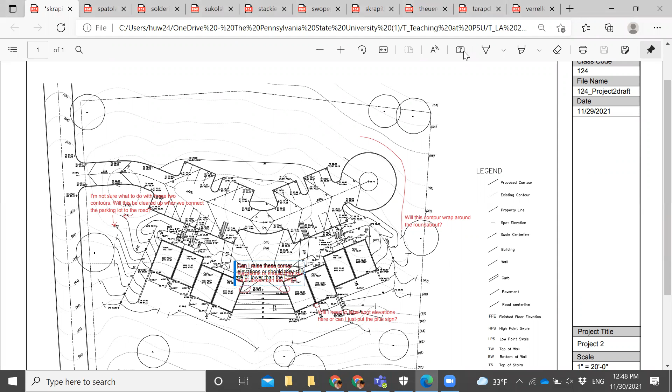I'm not sure what to do with these two contours. So I think the bigger issue is actually the contours before your buildings. Once we fix those, the contours on your parking lot will be a lot easier to do. Okay, so that's that, we'll come back to that.

Will this contour wrap around the roundabout? Yes, you have many contours on the north side of the parking lot that haven't been connected yet, so yes, they will be going around the roundabout. And the way to do it is to try to figure out the curb elevations here, which I will show you. Both questions are very good.

Do I need to label spot elevations here, or can I just put the plus signs? Oh, you will have to label them. And the way that you labeled them are correct.

And these two, can I raise these corner elevations, or should they still be 6 inches lower? Once you get to this point, these spots don't really have a direct relationship with your FFE. It's actually determined by the contours on the landscape. Okay.

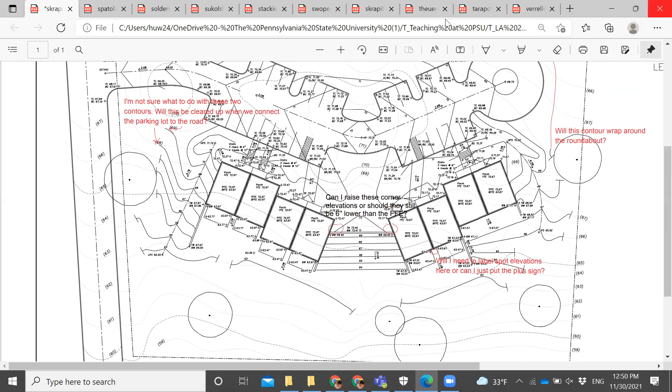Now I think it makes the most sense to look at your contours in front of the houses. Okay, I will turn up my speakerphone so that all of you can hear. Okay, better. No.

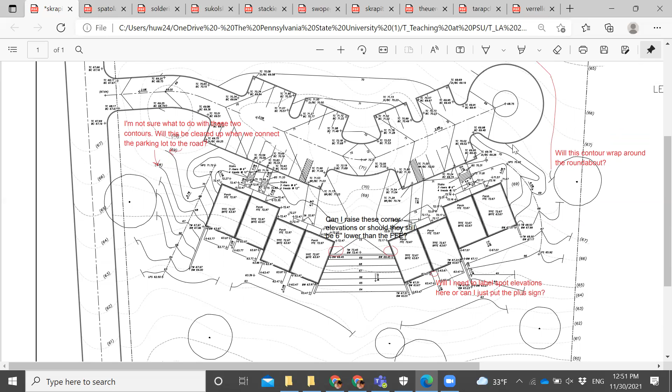So if I do this, I actually don't need to eyeball it exactly, I can move this over here. So I know you have a contour that needs to be connected somewhere over here, like that. And I can extend it, and that one I can extend.

So let's avoid this situation because we're going down, right? If we don't want to do that, given that your contour line slope is 9, it's relatively steep, so let's not do that.

Instead, let's use this line as a dividing middle line and split this. I know this doesn't really help, so just draw it in. These will be your 69 again, so that will be your 69.

So that's the parking lot contour part, we still have to fill that in. Now,

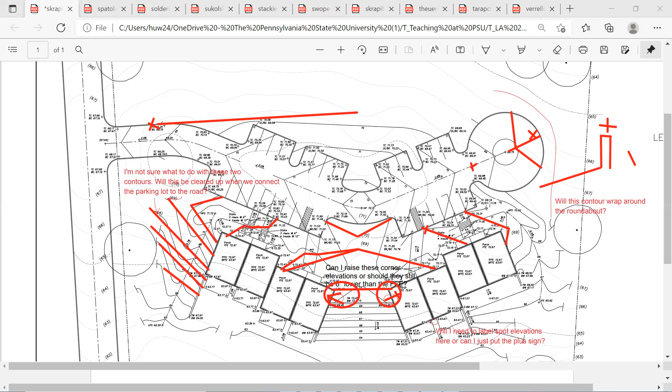Okay. The major question for you is actually these two contours over here. And then adding ramps, you have already got the stairs. Let me just pick one set of your walls and see if the walls are designed correctly.

I want to try to. Okay, so let's suppose we use your solution here of BW equals to 64. That's because you have 64 attached to this wall, but actually it can't be, because you have 63.97 down here, so your 63 needs to be along this line. So this contour, okay, if you want that 64 to hit the wall, for instance, you have to hit the wall.

For the end of the wall, there's only one spot elevation, because around that end of the wall it's the same elevation. It cannot have differences between the two sides of that wall. Okay, so if you want 64 to hit that wall, you have to connect up.

So then this BW does not conflict with the 63.77 here and the 63 over there. So the BW here, if it's the end of the wall, you would interpolate between the 63 and the 63.77. That is your BW. So that is how you design that wall. Okay, but of course you don't need that swale, as we explained before.

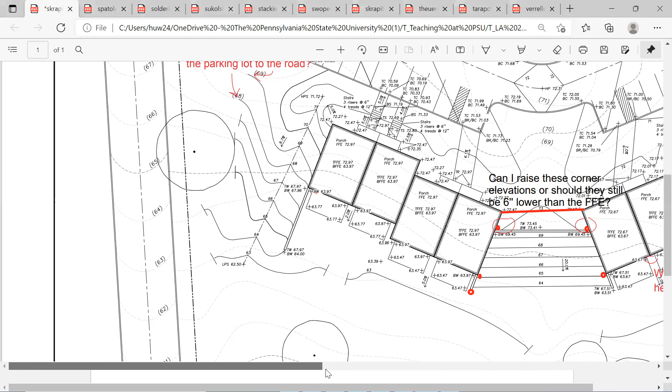Okay, I just want to check one side of the wall so that another major area that needs your attention would be clarified. Okay.

Well, why don't we try to go through all the submissions, and if any of you have more questions than what you have annotated on your file, we can come back to those, okay?

Let's take a look, the second submission. Clear, so I'll make sure if this is Joe. If Joe is here.

Does anybody know if Joe is here? Okay, okay, cool.

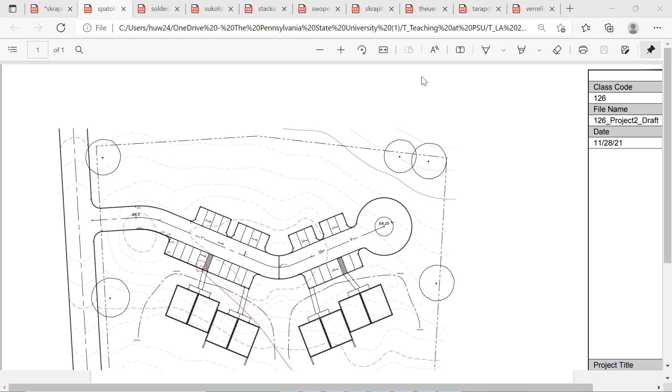So we have the center line now, we have the HP. We're trying to design the swale like that.

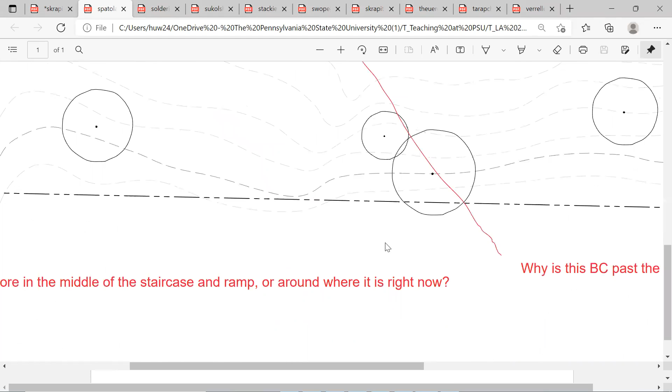The question is, why is this BC past the existing contour? Well, the existing contours don't actually matter that much anymore. By grading the center line, you already modified the original topography substantially, so you shouldn't be concerned about how your designed elevation for the parking lot doesn't agree with the original contour. You're actually redesigning the entire area, so that doesn't matter that much anymore.

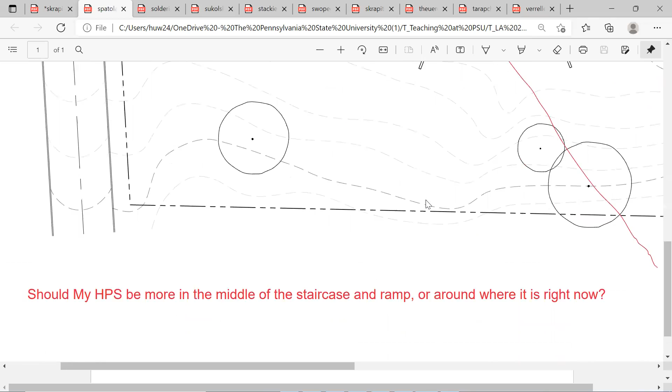Shall be trimming the curbs at the bottom of the stairs and ramps. You will be trimming the curbs right here. Yes, if your ADA ramp is right there, then you would be trimming that one. This depends on whether or not you use option 1 or 2 that we just showed you in class for your curb ramp.

If you did not intend to design a connected sidewalk like this to all the units, you can have one ramp over here that's the curb ramp, meaning you break exactly this portion of the curb. But you'd still need a sidewalk for the other areas. Designing just that one curb ramp for that unit is probably not a very cost-effective use of resources, because you want others to be able to share that.

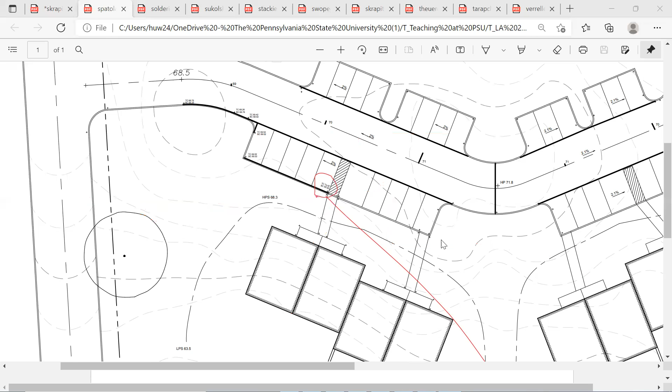I do recommend that you go watch the video recording from the week before Thanksgiving. I believe, at least in my group, we went through multiple examples of checking whether we killed a tree, or how we keep a record of whether we have 2 ADA accessible units and 2 units that are not. Definitely try to go back to those videos as soon as you can. So that covers all the questions on this section.

Okay. Again, let's go through these submissions, we definitely have more time. We'll have another chance to talk throughout it.

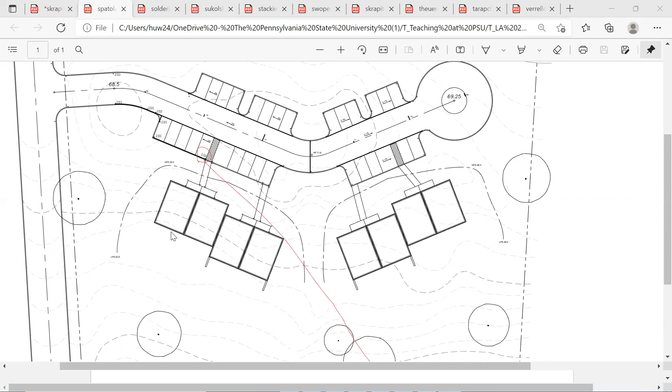Next one, let's see, I can't see the name. This is Aaron's. Aaron here? Okay, cool. All right, zoom in.

I can see in terms of elevations we're showing the progress, the key elevations, and we have elevations on the tangents that meet the road. So what we need would be that one. You can actually just start with that one, but you don't yet need that one to calculate these. So if you did not have elevation along this curve, that's totally fine. Starting with these two, we'll need you to have every spot elevation at every tangent.

Any form of swale, no, you don't need swales on that side because we're going down, consistently going down in this direction. We're consistently going down in this direction, so for that one, on the north side, you do not need a swale.

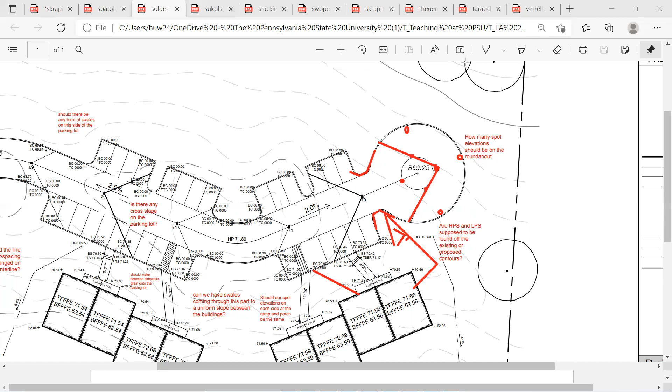Should the elevations on each side of the ramp or porch be the same? For the ramp, not really — it really depends. For the porch, yes; for the ramp, no. So for your 72 that's likely coming down up here, well the 72 might also do the kind of connecting to itself thing. And you have a 71 over here, another 72 likely coming up. So that's that, the same thing, like this.

So your ramp or walkway elevation will be dependent on the slope that you design for your walkway and the spot elevation you set. Generally you can see there is a slope in that direction. Okay, so if you mean whether or not this one and that one have the same elevation, likely not, because the contours are not parallel to the side of the building. So if that's what you meant, then those two elevations will very likely be different.

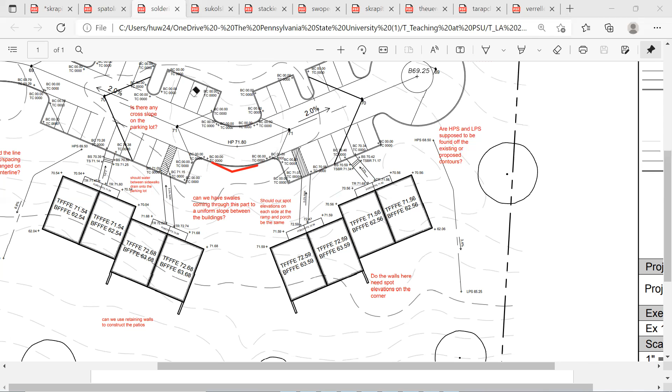Any, should the line weight spacing be changed on the center line? So right now, the center line you have here does not reflect the short dashed line yet. I would follow whatever drawing design standards we gave you for exercise 2 when we traced that construction drawing.

But again, we would need to work on the contours in front of the building before we come to the design of the square. And likely, I don't know exactly yet, you likely wouldn't need a swale on this side either, but you could definitely still spot it. That's weird. I don't have any other speakers, so well, I'll try not to turn away from my computer.

Water between sidewalks going onto the parking lot. Yes, please. And I still would recommend that you have a sidewalk connected across the entire townhouse; having one sidewalk is a much better design. And also stairs in case someone wanted to go this way, go that way, and then go that way. That area seems a little small to me, especially this one. It limits the option for people that want to go from the sloped lawn area to your sidewalk and then to your sidewalk. So you may want to change the location of the stairs to deliver a little bit more flexibility.

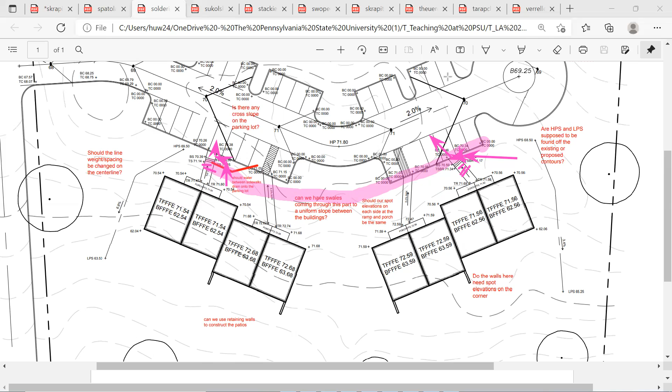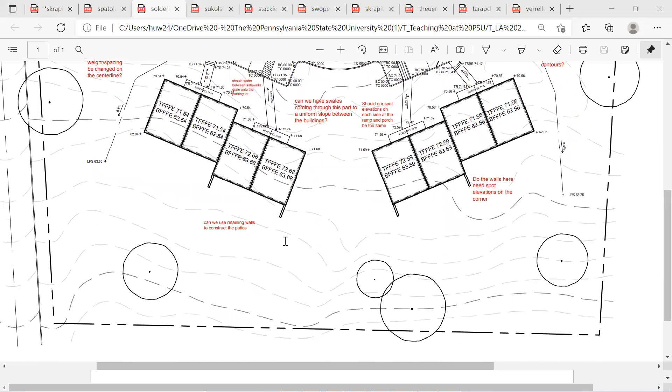Okay, so those are the questions you marked over here. Let's look at one of your units, and it's probably the same with the first one and last one. And for this one, it might be a little... Do you have a sense of which ones have walkouts and which ones don't? Yeah, I do need the table of that.

And okay, 54, 62. So that means the contour out of the back porch will be 62, meaning I will need to drag this up here. And then my 1 is here. Okay, so this is probably borderline okay if you want to have a walkout here, and I just need that distance to be below 75 feet. Otherwise, I'll have to move to 1, and that will still be the 3. For that one, 3 is over here.

This is 63, so that one should work. So basically that means I would have that walkout here, no problem. And this one, no steps, no steps. 63 should be fine, I can grab 60 over there. 63 is over here. So my 60 can be here, and my 2 won't be, is actually that one. That's your three. My two is over here. No problem, that's just what this is.

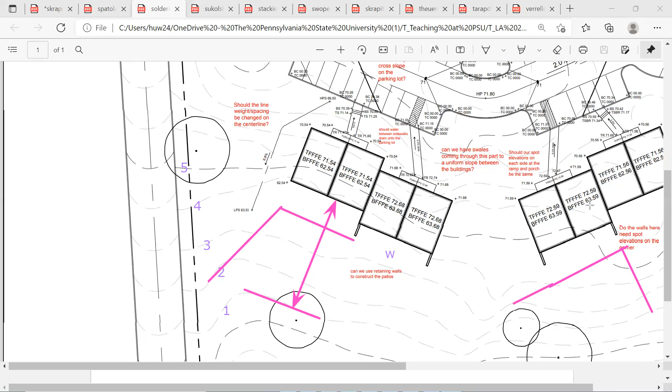So you wouldn't be needing to make a two over here. So it looks like you would be able to create at least two walkouts, two ADA, with your separate FFEs. That's good. That one, no, you wouldn't be able to touch 62, that's not necessary. Okay, so your FFEs, they are working.

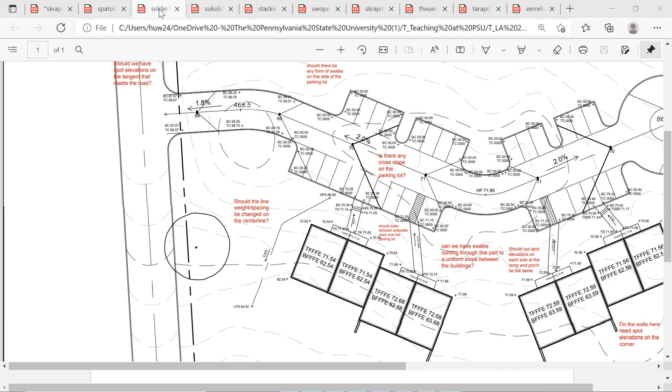71, 70, 75. I think what happened here is we are missing 0.5 once you are up. So you calculated this based on BC, but you don't have a ramp there, so you actually can calculate that based on your BC. Okay, so we can use one step, or you can add 0.5 to all the spots from that point, right? Okay, I think I have checked your questions in two more areas. But again, let's come back if we have more questions.

Moving forward, so we have to do this out here too, even though these two are okay, you can leave them out.

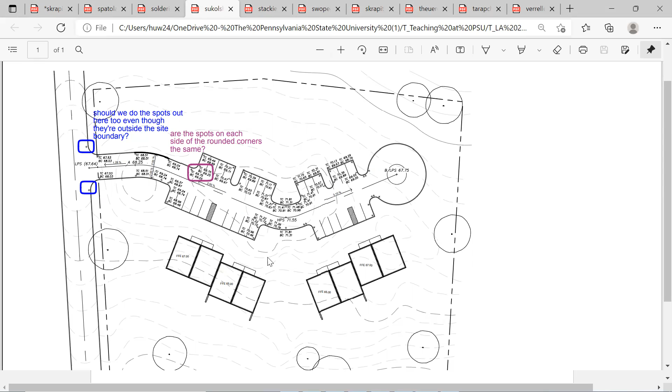Are the spots on each side of the rounded corners the same? So we talked about the spot elevation calculation. Ideally, statistically, it would be the last step you calculate, because the spot elevation of the parking lot is dependent upon your contour design. In the case that you need to alter the contours, everything will change. So you would not actually calculate this at this point before you have contours. So, the spots on each side of the rounded corners.

I wouldn't say they are the same because your contours look like this. Suppose this is the contour shape. That one, for instance, is the same as this one along the center line. And this one is the same as this one along the center line. And they are obviously not the same.

So there are multiple ways to calculate elevation on the parking lot, but I found this method to be pretty straightforward. Basically, you find the spot along the center line that is at the same elevation as your spot. You project a line that is parallel to the contour line to the center line and calculate that spot according to your center line slope. I found that to be a pretty straightforward method to calculate.

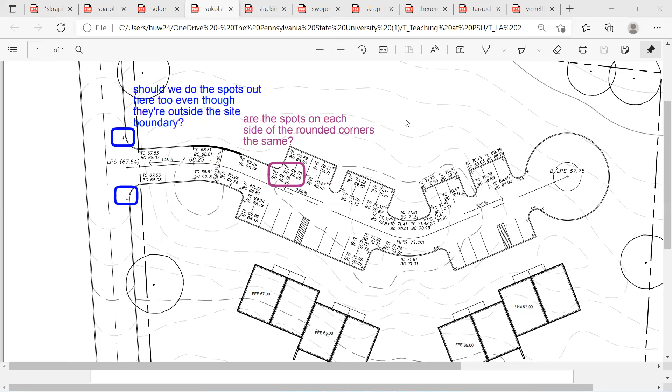So I would maybe leave the parking lot spot for last. Once you have figured out the parking lot, I think the next step for you would be the parking lot spot, and then follow the procedure of finding the FFEs and work on the contours around.

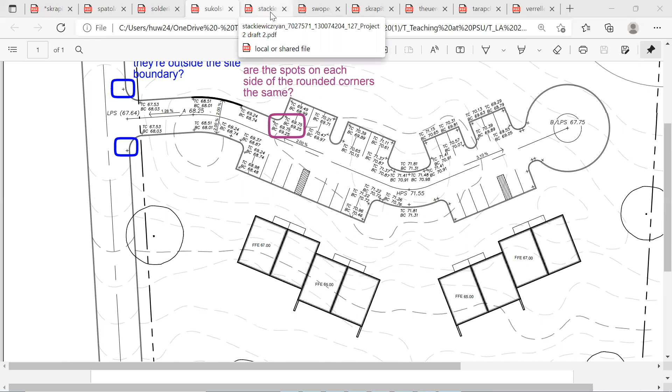Okay, moving forward. So, this is Ryan's. Ryan here. Thank you.

Yep, we went through those, they are not necessary. Are we able to change the SE where the sidewalks match FFE so there's no... and it depends on which one you are talking about. The spot elevations of the sidewalk or porch, it would match the tiny difference would be below 0.1. Okay, so that spot elevation can be equal to your top FF.

And yeah, we talked about the drainage pattern. Drain the front of the house to the parking lot, drain the side of the house down the hill. Using either a swale or you don't always have to have a swale.

Yes, the drains in the parking lot would be at all the deck corners. An example would be here, right? That's the lowest point in that area. If you don't have a drainage inlet, water has nowhere to go. So anywhere in the deck corner, you would need to do PI/BC or BC/PI. Annotate that file. Okay.

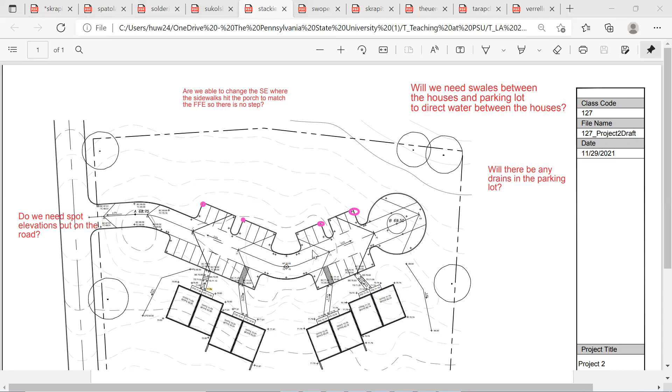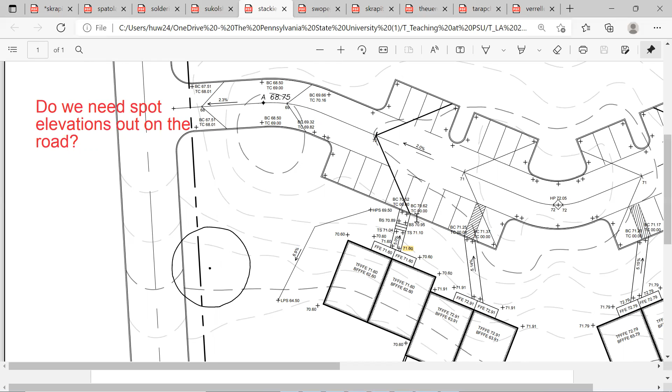It's likely the same thing. We're calculating this based on BC. Okay, and bottom of the 62.60 seems likely it's going to work. That's okay. And then these ones are very similar to what we critiqued before, so they would work.

Okay, I noticed a very common error here. These elevations will be determined by the contours once you have a draft of those. You would not be determined by your TFFE. We would have contours. Later on, you would have contours going down like this, and whatever this contour is will be between the two adjacent contours. So it's a little too early to specify these because you don't have your contours.

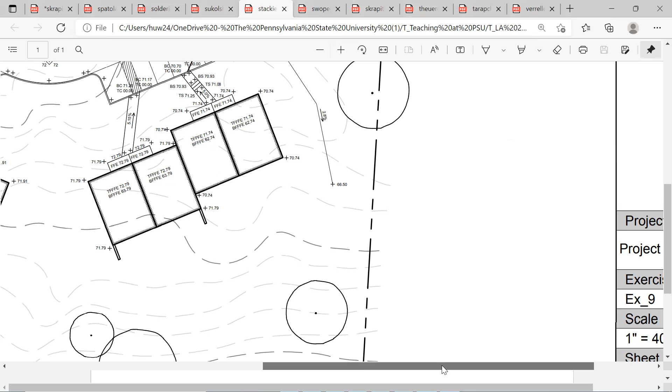So, yeah, for this I have the same comment. It would be to start looking at the contours in front of your building. Right? I hope that... Kyle's is probably one draft that has the contours in front.

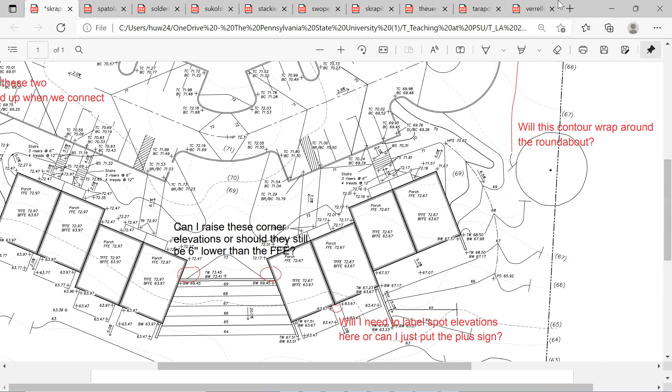Well, if you can make some progress revising them in class today, if we can give another critique, it may help others get an idea of what those contours would look like crossing the sidewalks. I think that may be beneficial, but I definitely don't want to show you.

Without a graph here, it's really hard to specifically criticize if they agree with the spots that you have. That's the most critical thing for these folks—they have to agree with the slope and the spots you designed for your walkway. We know the general direction, yes, they should slope to the parking lot, but what's the exact shape of that contour? You need a more advanced example.

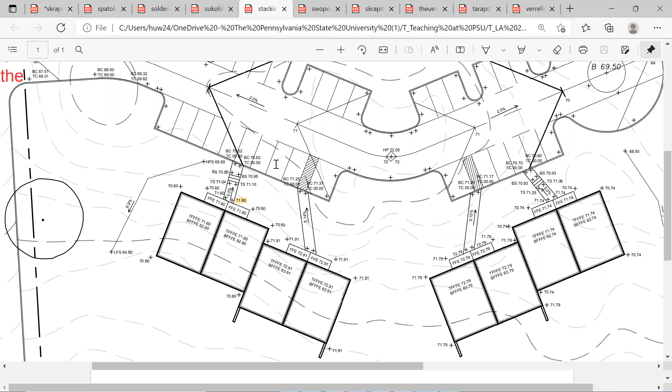Okay. All right. Moving forward. And this is, yeah.

Why does this number disappear? I'm not sure which number you're referring to. Is it this one? Yeah, okay, so that number you could calculate from the existing contours. So it's not necessarily given to you, but it was given to you in the base map.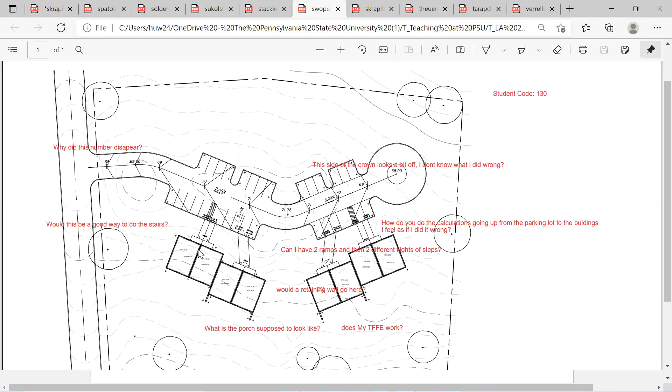Would this be a good way to do the stairs? Is it showing up the stairs? Okay, so this feels like you're designing a pretty wide sidewalk over there. So it would basically be a set of stairs. It could be right here before you get onto the porch, or you could keep some distance too, if you don't want to go out of the porch directly to the set of stairs.

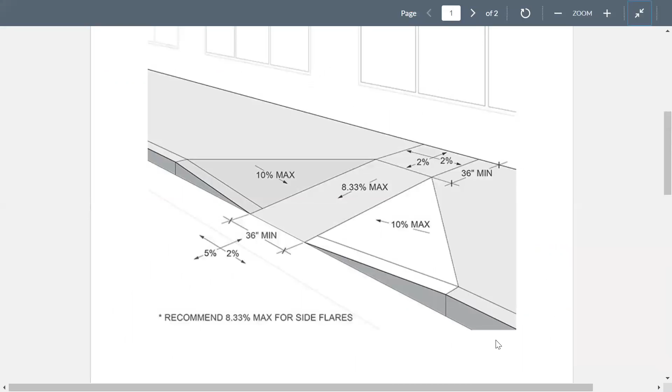There's really no single way of drawing them, but you can refer back to your exercise 7 where you have walls, ramps, and stairs. The number of lines will be the number of steps plus 2. If you have 3 steps, you have 5 lines. And you know how to mark the dimensions of the stairs, right? So use that set of representation guidelines to draw and show the stairs. What we need to know is that your calculation, the number of steps, actually agrees with the adjacent spot arrangement of the stairs.

So the side of the crown looks a bit off. Yeah, I don't think the shape here is correct. They should—your contours would have the center line, so they technically would be able to be mirrored. Which means your 69 would go like that, and your 70 would be like this, if the other color is correct. Which I don't think it is.

So we kind of explained two weeks ago how we would know whether or not you had a 3-inch crown, right? A 3-inch crown would mean that if I project that over to the edge of the driving aisle, I would basically be connecting to the fourth point—divide this line by 4—and then if I connect that way, I have my 3-inch crown. The reason being, I'm essentially looking for 69.25 along the center line here to get to where 69 is at the edge of my driving aisle.

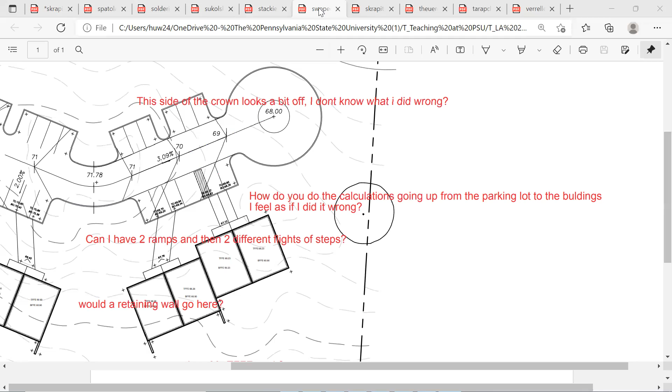So that's the second contour. Moving forward to your next question—I feel as if I did something wrong. We can check a set of that to see if they would be able to work. Let's see, they are a little—yeah, they're too low right now.

And all your units have 60 as the next contour, meaning that if you have a walkout, you're clearing the ground, because the original ground there is about 63, or a little higher here, but there's no original elevation around 60. Does that make sense? The original contour is about here—you need to clear everything, kind of back out all those high areas, to create a 60 contour. So none of the units here has a walkout yet, meaning that you have to elevate.

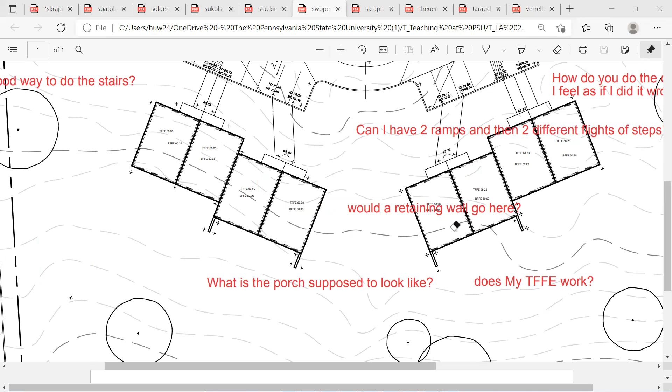And these two, with stairs or no walkouts, either will be fine, as long as it went down. So correct those and start working on the front contour. Contours in front.

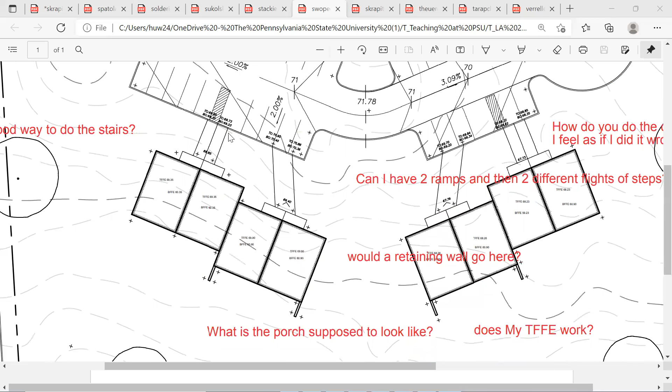A retaining wall needs to be dependent on the bottom of the footing and existing contour. If you created a lower area than the area on the other side, in that case you would put a wall in. So let's work on the bottom of the footing first and put the walls there regardless. If you find out this wall can actually connect across to the other side, then you can get rid of that wall. You can self-critique to see, based on the rules of the wall, if it's necessary to have that elevation size of the wall. If not, the wall goes away.

Okay, your porch, the shape of the porch looks okay.

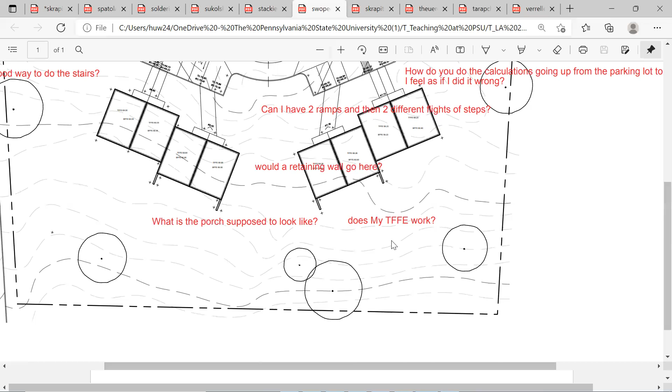Can I have two ramps and then two different flights of steps? Do you mean for the same house or for different houses? They can share the walkway, and the steps or the ramp can be shared between two units. Consider that one house, okay?

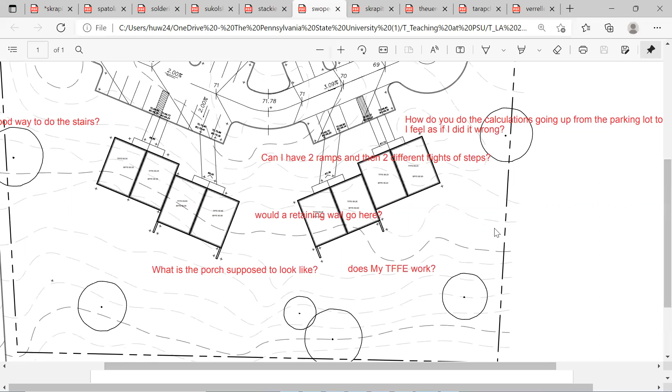Okay, moving forward. And this is Charles, right? Yep, Charles. Charles here, online, I think. Yes, okay, Charles is online. We're reviewing your work now.

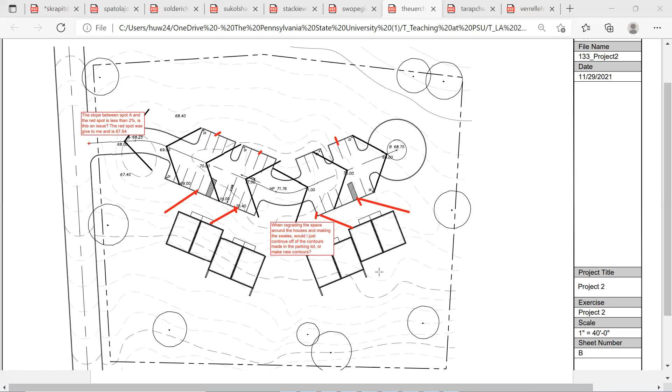And next one is from Dana. I know that you're online, can you hear me okay? I would then assume that you could hear me. All right.

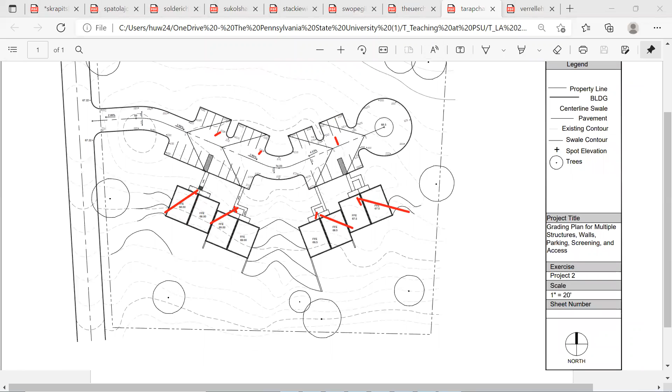So the parking lot contours are completed and we have spotted issues. Right now they're a little hard to see, but let me zoom in. Dana, you do need to increase the size of your spot when it's at print scale.

I can't hear very well. I don't know what the reason is, because I'm very close to my computer. Given that you're online, I am going to turn up my speaker. Is it better now? Okay, so the problem is probably my speaker. Okay, yeah.

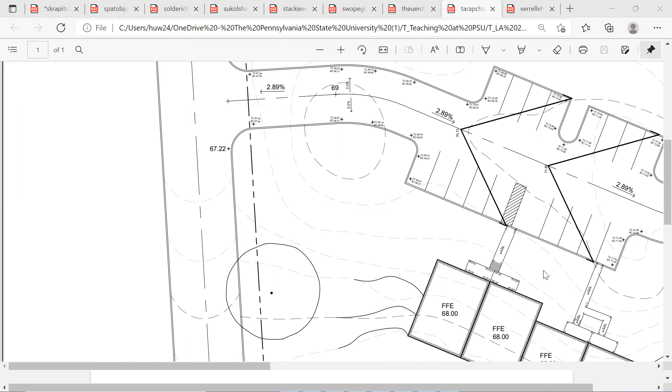Let's take a look at the spots. We have 70.31. I'm not sure, so if this is the 71 contour, you wouldn't have 71.89 on your 71 contour, right? Or is this marking of it, the label? I think the arrows are pointing. Yes, the arrows are pointing in the wrong direction.

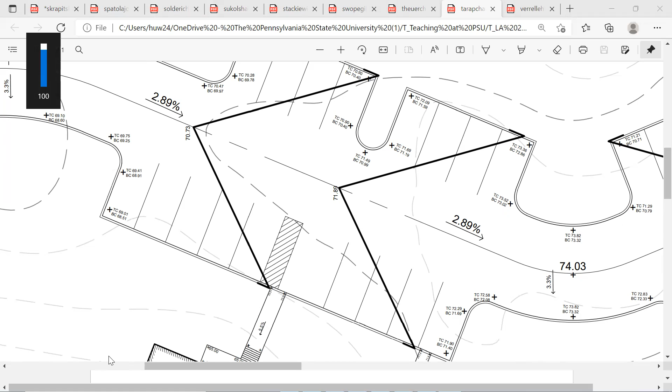That's right, let me open this up. I should be able to hear you if you can directly speak. So I don't know why these are marked as 70.73 instead of 70 contour or 71 contour, and I believe if this is 74, this is probably not 71. So I'm a little confused about the contours here.

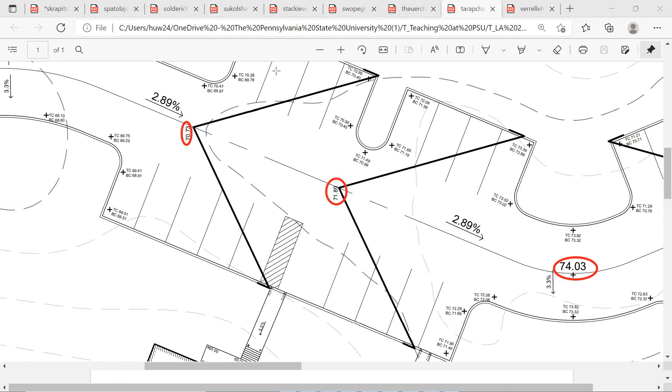Yeah, these don't seem... so 68, 68, 69, and then you need a 70 and 71. So these, two more contour lines there then? Yes, we need a 70 here, and 2, 3, 4.

That looks okay, but I think the first thing you need to verify is whether or not these are integer contours, meaning this is 69 and that is 71. If that's the case, you would have one in the middle.

Not drawing very well here. You would have that as your 70. If that's the case, it does look a little steep to me. So it's still below 5%, but it does look steep enough to me that if that exceeds 5%, then that's a problem, meaning the steepest slope on your parking lot is actually over 5%.

So what you could do, if that's the case, is lower the slope here, meaning I won't get up to 74 over here. The only thing is, we're short on time to make big changes.

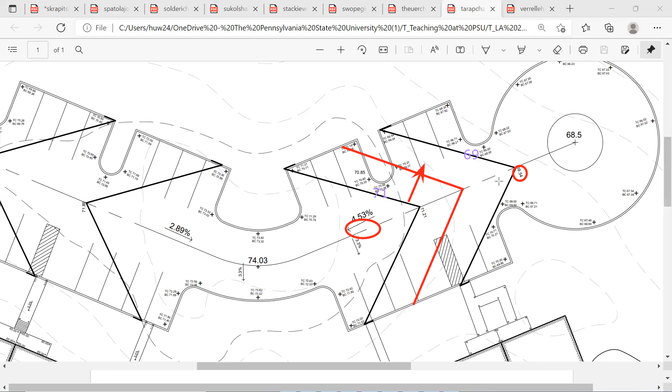If you can verify that this slope is below 5%, then we can keep moving with this solution. We're not violating any slope parameters, but if this is over 5%, then we will have to make some changes to the slope along the center line to keep it under 5%.

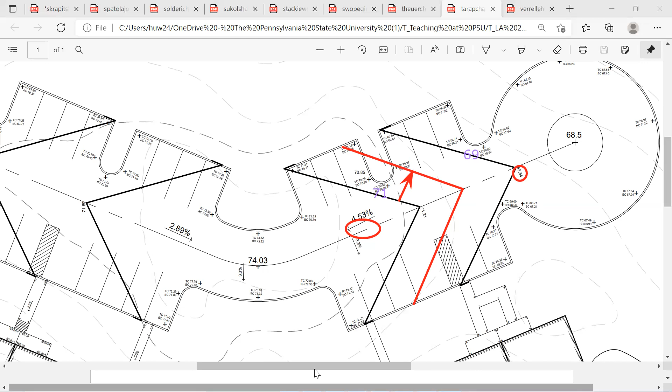Okay, so I lower the 74 then? Yes, we would lower the 74. And the other thing is...

If we assume these spot elevations are correct, if this is 70.31, so far it doesn't have a ramp yet. I would want to verify if this is BC or TC, because we already reviewed a couple of submissions and we know this is a common kind of oversight.

We calculate our BC and we forget to add 0.5 to get to the TC, to know whether or not, or to know what slope or what elevation we can get for the FFEs. Does that make sense? The next thing is you would need to lower that down, because you cannot exceed 5% slope for the sidewalk or walkway there.

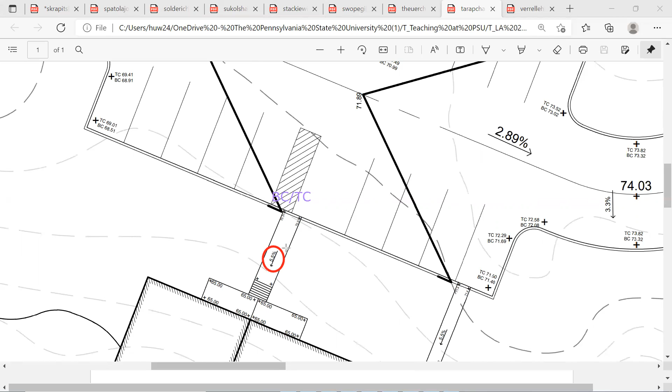So we'll need to lower that down. And then if we move to the FFE, I think there is some issue. If we keep going up...

This would not be 65, because we're going from 70.31, for instance. So, let me draw that one first. Again, this is in cross section. That's the curb.

This is a parking lot, right? And then we're going up to our houses. That's probably the front porch. And then we have our house. This is the TFFE, that is my BFFE, and that is my back patio. And there's likely some steps over here.

So I'm going up from 70.31. My top FFE would not be 65. Now, would my bottom FFE likely be 65? It could possibly be. But at the same time, I don't need my bottom FFE to be 65 — 65 in our project would be considered a pretty high bottom FFE there.

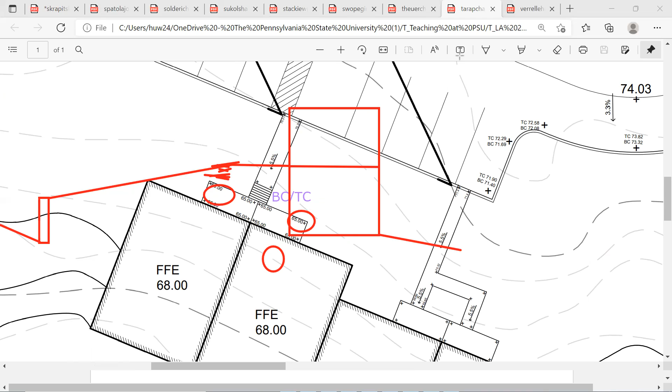So the 65 here needs to be re-examined to see how you got to this. You probably would need a couple of stairs here if you don't want to have the walkout at the back. So the relationship here — always keep that cross section in mind.

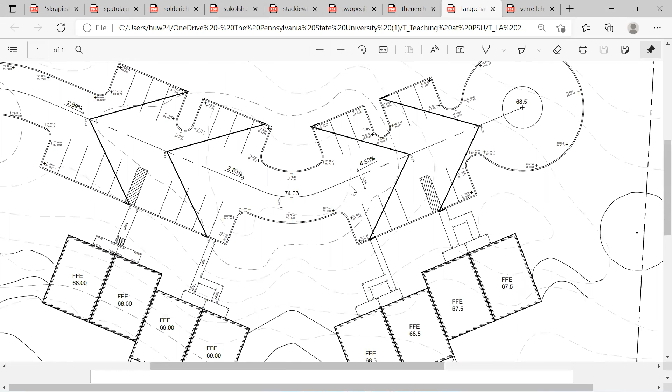So Dana, your next step would be to verify the parking lot contours first, and then double check if you used TC to calculate this. Then you would need to go back to the FFEs using that cross section to guide, for instance, without any steps, how high your TFFE would be. Now, if it's not high enough for the TFFE, then add a couple of stairs in front.

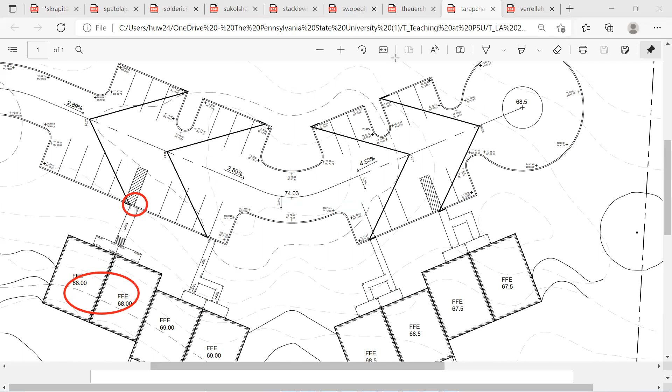Yeah, you're welcome. I have Haley, I believe.

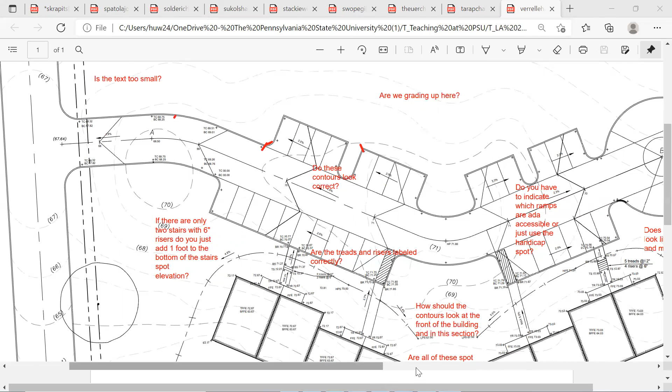Okay, so yes, we definitely need more contours to finish the side here in the north. Do these contours look correct? They look correct to me if you mirror them over there. If I do a quick check, that looks to me like it's fourth, so that seems to be correct.

Do you have or use the handicap? Yeah, you can use the handicap spot to indicate where you are designing the curb ramp.

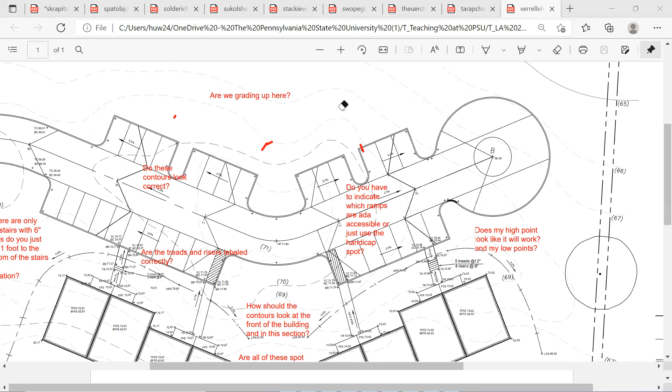Does my high point look like it will work and my low point? So your high point is over here. Let's move it back to somewhere over. Okay, so let's keep this, or even not there, as I can see that this one comes up somewhere over here, or the midway, and then that seems like where my contour will come out. So that one will go something like this. And then if you are going to design a swale, your high point will start below that contour.

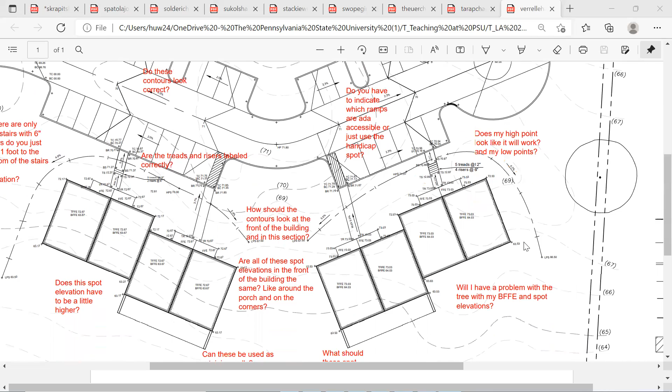Alright, let's check the BFFE entry. So the BFFE before, you would not have a... okay, in that case, we don't have a walkout. If we don't have a walkout, you don't have to move the 63, then you're fine.

What's the situation over here? Let me draw again. I'm just going to draw that out. And BFFE there. And here, if you have 64 point something, the ground does not have to be lower than that if you don't have a walkout, right? Your ground can be a lot higher like this. So basically meaning that you can have 66 at this, for instance, like this. And nothing here needs to be moved, so you don't have a problem with that.

So that's how you can treat the back. I don't know if you have a basement where you live, where I can only have one very little window - that's sort of the situation where you actually have the soil against the wall in your basement.

All right, so that's for this one. What should these spots be? So for these spots, those will be determined by your porch, right? These two would be the same as your BFFE, and then you design for a 2% slope down. So those two will be determined by that, to go down 2%.

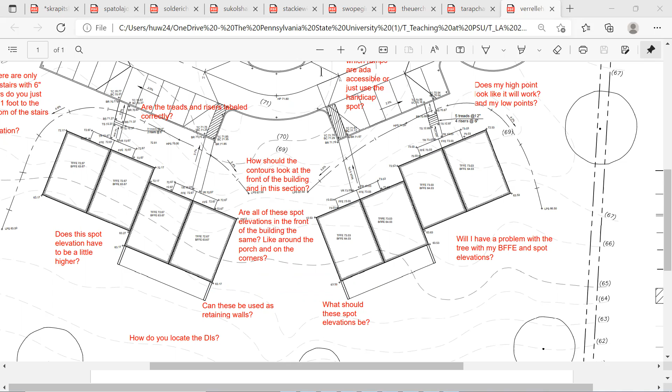Are all of these spots in front of the building the same? They would not be. Let's just zoom to one step so that I can explain the differences. There are definitely a lot of spots that you need to specify. Some of those spots will be determined by the porch or TFFE. So, for instance, these - you could specify a porch FFE that is the same as your building top FFE.

They could be the same, or you could also have a slope away on your porch. Either way, if it's small enough you can assume it's covered and doesn't have a slope. But these four are determined by your FFE. The top of the ramp here would be the same as your TFFE, as your porch FFE, like you have specified there.

But these elevations are actually determined by how the landscape slopes. Okay, so if you have your 70 over here, meaning it's 71, the contours are actually going this way, then you would have a 72 somewhere here in order to drain. Oh, this is pretty flat, you may even have 73 - yeah, you do have a 73 over here. So the contours in the middle need to form sort of a V shape, roughly, creating a flow of some sort in order to, yeah, it needs to be.

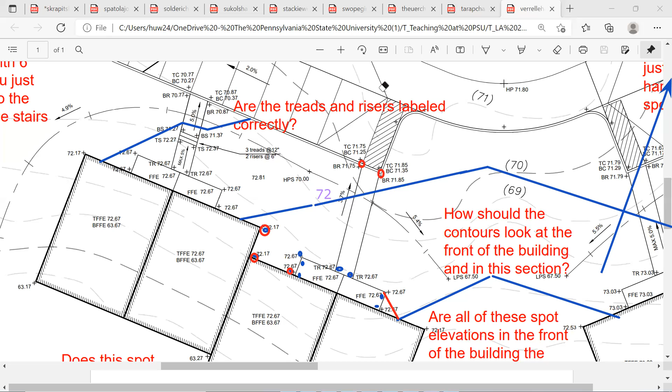Does this spot elevation have to be a little higher? Which one do you mean? This one? That one can be the same as your FFE. You can raise it, because I get what you're trying to say. So generally you want that to slope like that.

Oh okay, you don't have any walkouts here. If you don't have any walkouts here, these spots often don't have to follow your FFE. It can even be 64 if it's easier for it to get back, since you have soil at the back of your building, a basement wall. So those two, if you don't have a walkout, they can be higher than the BFFE, no problem. If these two have no walkout, it's determined by however the contours are actually connecting. If I want to connect like that, for instance, then I would have a 65 point something over here.

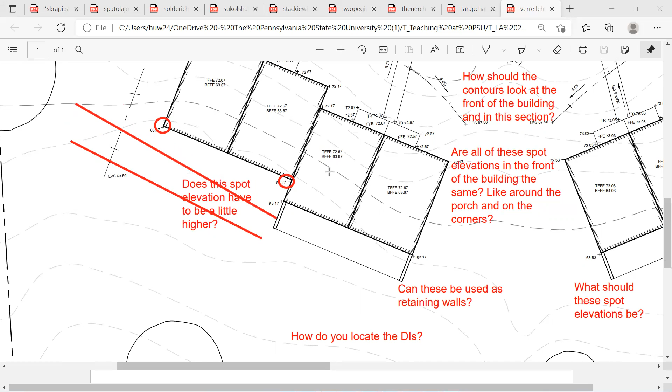Okay, all right, so let me zoom out and see if I've addressed all the questions. How do you locate the DIs? For yours, your DI is in fact at the end of, let me put that here. Okay, so this is a swale line, right? If you designed your parking lot like this, you would just set a few certain distances away.

Along the swale line, okay. Maybe boom, so yeah, I think that is good. One segment, one DI per segment of the drive of the parking lot. So let's see. If I start with the higher, yeah, this is the higher. Let's use 2 along the way. Higher, okay, roughly in the middle I would have 1.

So 2 along that direction, another 2 along this direction would be okay. So let's put this back down. Once you get here, actually you would have something in the middle because you're going down and you're going up. So yeah, in the middle here you would need 1 more. 1, 2, 1, 2, and out of the page.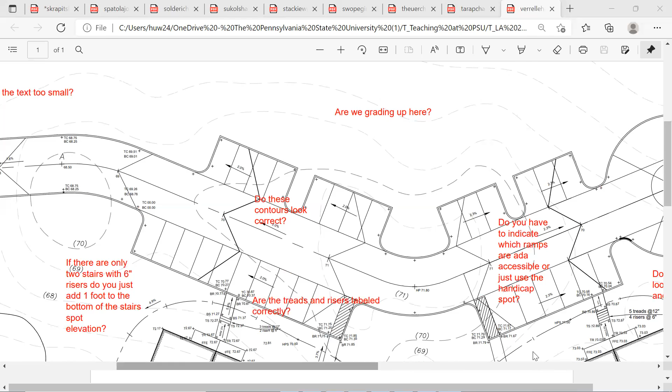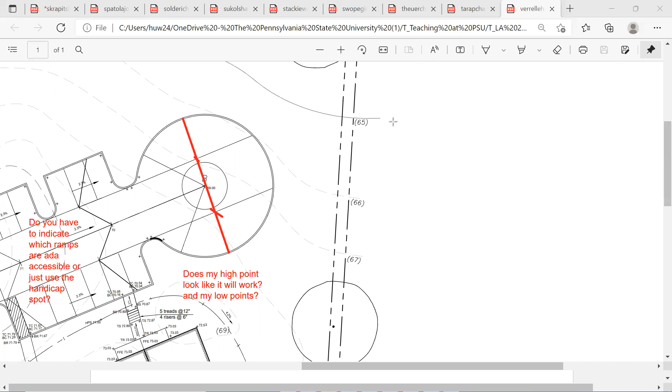If you're flipping the contours over here, we're going down and going up, right? So we need to look for the lowest spot, which is actually along that line, this line. Lowest spot is along this line, and those are the locations where you would put the DI. All right, okay, so that's that. Anything else that I missed?

Okay, so your TFFE, BFFE, roughly they work. Your next step would be working on the front, the contours in the front. Get rid of most of the swales in front of the buildings and start working on the back side. You would need the front contours to start working on the side contours, and then you work on your back porch elevations. And the last step will be grading in the north. Okay, all right, yep, you're welcome.

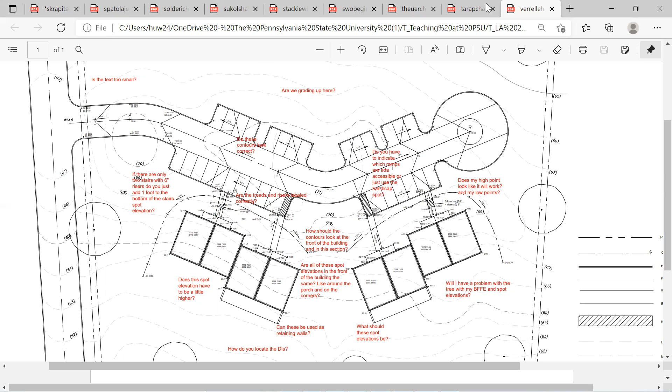I am going to go back to my office and drink a little bit of water, and I'll come back.